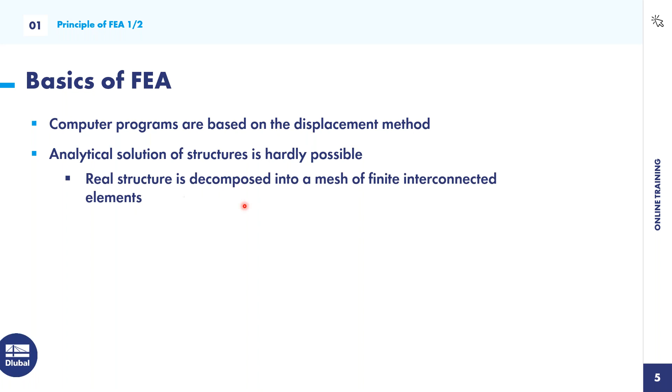So what you can do is decompose the real structure into a mesh of finite interconnected elements. At every element, or every element continuum, there are properties which will be described at the nodes, and then the mechanical behavior is described by approximation sets. Be sure that the finite element analysis is just an approximation of solutions or results.

And the most important point is the discretization. So what is discretization? It's a decomposition of the structure into finite elements. This is one of the most important steps in doing a finite element analysis.

So how does a procedure of a FEA calculation look? First of all, you determine the stiffness relations at local elements. You do a mesh of the whole structure, and then you transform the local stiffness relations to the global coordinate system.

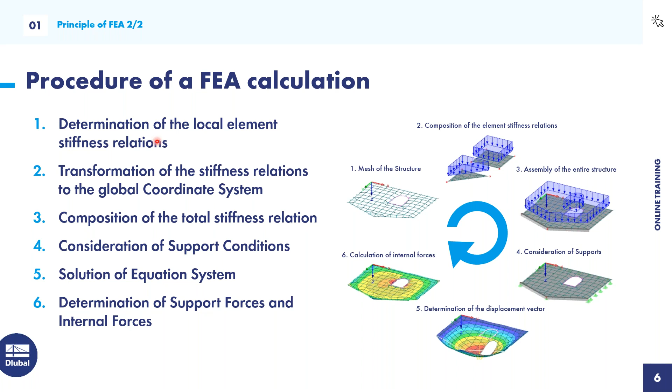Then you assemble or compose the total stiffness relations for the entire structure. You also have to consider some boundary conditions, like supports or hinges. Then the program calculates the displacement vectors, and after that you can calculate the internal forces and support reactions. So much for the procedure of FE calculation.

Now, this will be our first example, the continuous plate. But before we do this as an example, I prepared some questions for you. First, I jump to RFEM, the program, and I want to know if you work with two monitors, two screens, because if yes, I will adapt my pace and this would be more helpful for you.

Sometimes maybe we should mention that it doesn't work in full screen. So if not, just exit the full screen and you should be good to go. Thank you for the hint, Praxitelis. That's sometimes a problem, but this is the solution.

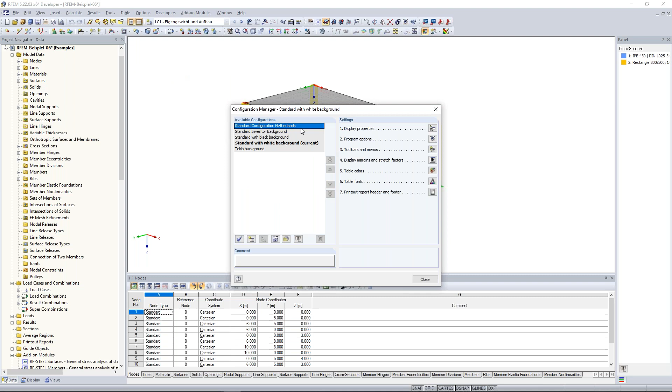So when someone is wondering why I have the white background and you are using the black background, here you can change it. Click here on options, configuration manager, and change the white background to the black background. Just double click on the black background. Now I have the black background, but I prefer the white background, so I click back to the white background.

Another interesting point, the program options, because we offer at Dlubal 10 different languages - English, Dutch, French, Italian, and other languages. So if you want to switch the language, just close the program and start it again, and then all program settings will be changed to the right language.

Under the menu bar, you will find the symbol bar. With the help of the symbol bar, you have faster and quicker access to the most important functions of RFEM. So if I want to create a new single member, just click here to new single member, choose this profile, and draw some members here. This is the fast access to the most important symbols.

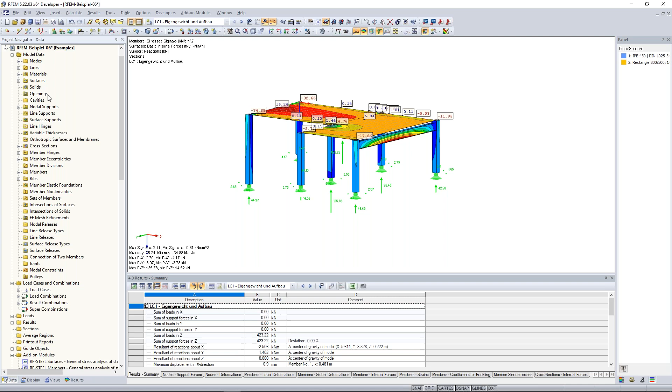Here on the left side, you see the data navigator, and with the help of it you have access and an overview of all existing model data. So here, for example, the materials you are using for this project. When I open this tree, I see materials - I see 2 different materials. First the concrete, and then the steel girder here on the right side.

The same with the surfaces - I have an overview of all existing surfaces, and the same also for nodes and so on.

When I click, for example, on one node, maybe here the 5th node, normally it will be selected here in the work plane, but you don't see the node so well because the nodes are very small. So just with a right click here and say find, and then a red arrow shows to the node.

And the same also for all other things like cross sections. If you click on one cross section, it will be selected.

At the bottom, you will find the add-on modules, with short information about RFEM and the add-on modules. With RFEM, you can calculate almost everything - RFEM provides deformations, internal forces, stresses, support forces, and soil contact stresses. So just these kind of results.

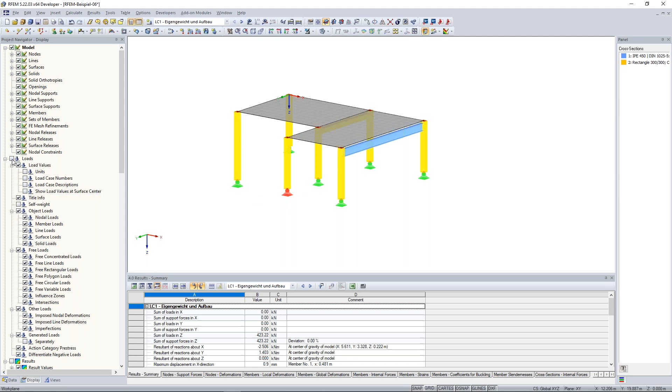For example, I don't want to see these supports here. I go here and deactivate the nodal supports, and I don't see the nodal supports anymore. The same with the loads - here I can activate them. I have also this kind of function here in the symbol bar, and the same with the results.

And also when I don't want to see the FE mesh, I can deselect that. Also the numbering, maybe that's interesting for someone.

One tip from my side: use colors and graphics according to the cross section. Especially for frame structures this is very helpful, because when you're using more than one profile, maybe 5 up to 10 different cross sections, you will see all cross sections in different colors, giving you a much better overview of your structure. Normally you have a standard, concrete has the color gray, and steel has a blue color, but if you have more different cross sections, this kind of information is very helpful.

The views navigator - if you want to have more different views, especially later for the printout report, or when you want to divide your structure into better parts for your calculation, the user-defined views will help you.

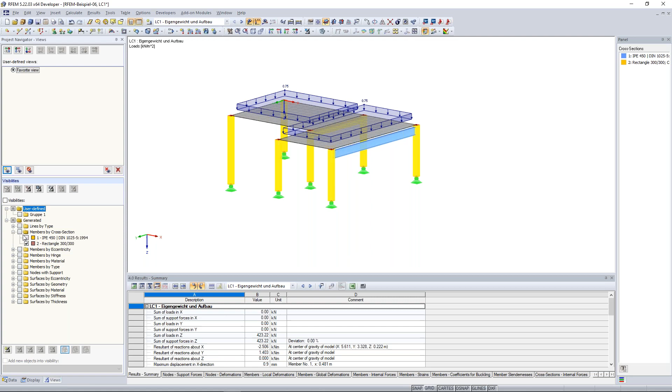The same also with visibilities. So when you want to filter some objects, some specific models, I would recommend using these visibilities. In this case, I want to show only my columns, so I go here, say members by cross section. I know the cross section of my column, so I open this tree, activate just the rectangle, and you will see just these members of that cross section. Very helpful to do that.

The same also with my steel girder here, steel beam. And now to the last tab - this is the result tab in the navigator. Here you have the possibility to show different results, so I cancel my visibility.

Now I want to show maybe the global deformation in UZ, the vertical deformation. I see here the steel beam, here the plate. Now I jump to the member - in this case the bending moment is interesting for me. So I see the bending moment of the steel beam, also this one here, and maybe also the normal forces. Interesting.

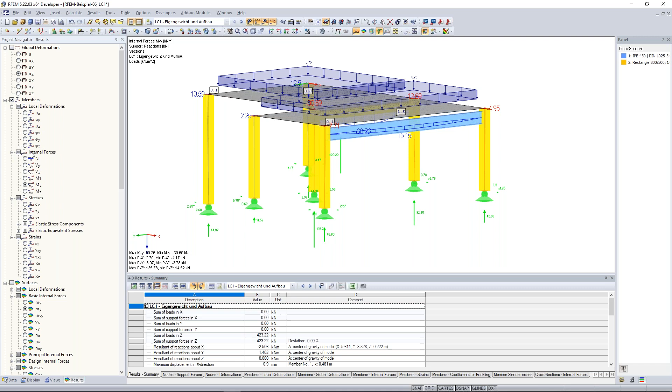Here's a short information about the tables. Here in the tables, you find all information of the models, loads, load cases, and so on, also the results. The one big advantage concerning this navigator on the left side is that you get more information, like here in the data navigator.

So when I jump to the materials here in the tables and to the materials here in the data navigator, you will see I have more information about the materials here compared to my data navigator. This is one big advantage, and it will interact with everything - when I create something in the tables, it automatically gets the same information here in the data navigator. So you will see in RFEM it's possible to create something in different ways.

Not only with the tables and not only with the data navigator, but also with the symbol bar and the menu bar and so on. It's up to you which way of inserting, which way of modeling something, is your favorite one.

Now some information, a short introduction to movement in RFEM. With the left mouse click, I can draw a selection window. It depends which side you begin from - when I go from the left to the right upper corner, to the right bottom corner, I select just the things that are really within this selection window.

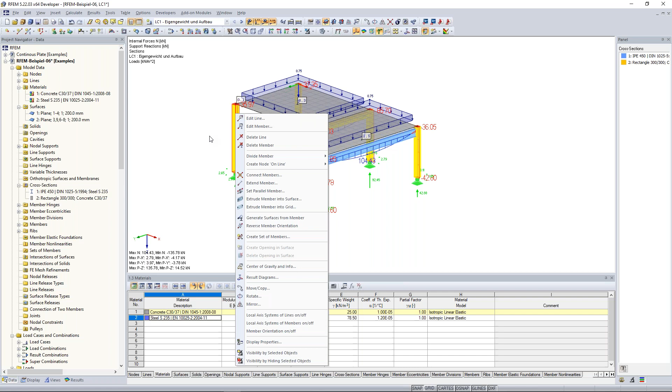Good, I think that was everything concerning this introduction. Praxitelis, some additional information maybe?

We've got one question, Daniel. Someone is asking how we can make this adjustment of the units permanent so it won't change if we close RFEM.

You can do it after, or every time. Just go to the options, and there you will find units and decimal places. There you can edit your favorite units and cross sections, and then you can save it also.

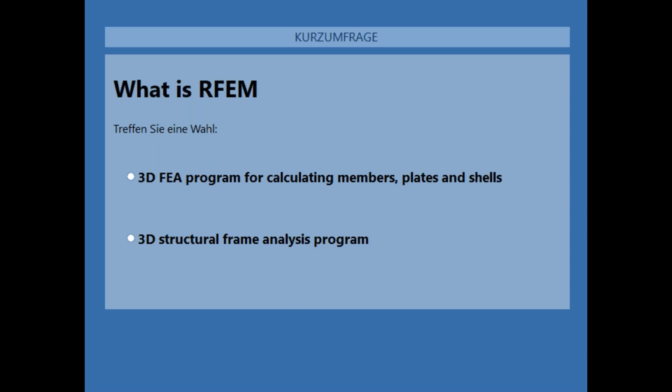Okay, I close this poll. And again, most of you were right. RFEM is a 3D FEA program for calculating members, plates, and shells, not only frame structures, but also members, plates, shells, folded plates, solids, contact elements, and so on.

So let's begin with our example. I jump back to our example, the continuous plate. The first step is modeling our continuous plate. First I want to show how it will look like. It will look like that, yeah?

We will model 3 different surfaces, and then we compare these results with our member, so with a continuous beam. And we will discretize it in different meshes, so we'll have different sizes of FE meshes, and it will be very interesting how the different results interact.

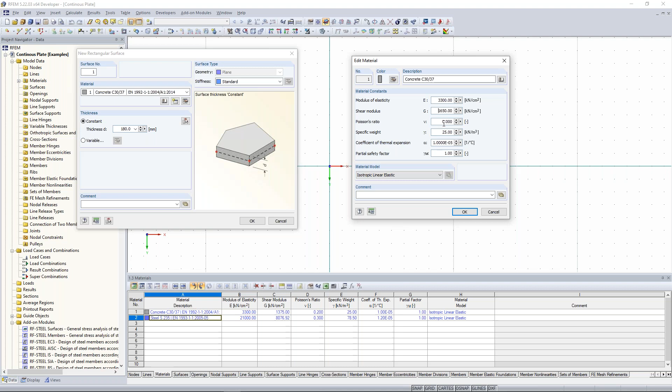Okay, I click on OK. One important point is that we set the Poisson's ratio to 0, in order to have no impact from shear deformation or additional shear deformation. Click here on OK.

And then we set our thickness of our plate to 300 millimeters. Click on OK. And then we draw our surface 10 meters long and then 5 meters into the opposite global Y direction.

And for the training, we do the same again, exactly the same again. So again, click here on new rectangular surface. Click just on OK because all information is right. And draw this rectangular surface again, 10 meters long and 5 meters high or wide.

And then I want to show you one big advantage: now we want to copy it. So select everything, draw a selection window over the whole surface. Now click, right click on the surface, and say move copy.

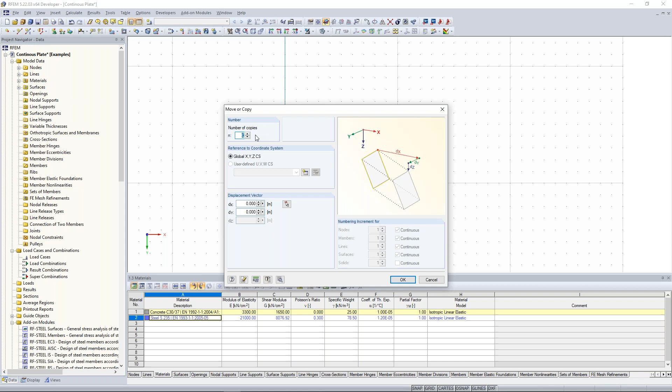And here we say, okay, number of copies should be 1 because we want to copy it. And the displacement vector should be from there to there. So now we have two possibilities: to enter a value of -10, or to pick the displacement vector.

I want to show you this option: select 2 points and return displacement vector. I click on that, say from there to there, and the displacement vector was created automatically. Click on OK, and voila, you will see this was copied here, exactly 10 meters higher.

Good. Now I want to have the additional continuous beam, or a beam. So I want to move these 3 surfaces a little bit. Draw a selection window over the whole 3 surfaces, and grab the middle surface at the left bottom corner, and grab it from there to there.

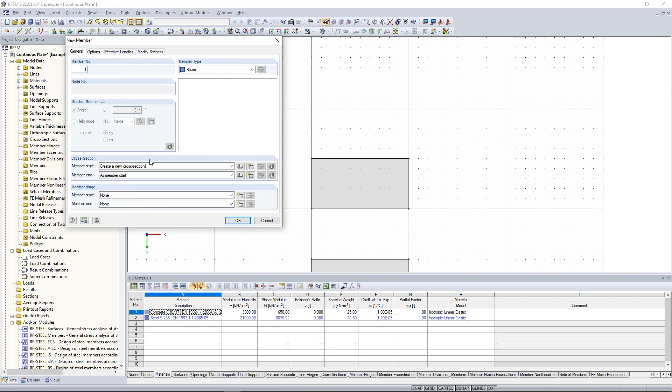I click on that, and because we haven't created a new cross-section yet, we have to create a new one. Go here, create new cross-section for member start, and then you have the possibility to set your cross-section properties manually, but of course you can choose one of the already provided cross-sections. Here I decide to take this rectangle cross-section.

So I enter the value of the width, 1000 millimeters, because I want to relate also to our concrete surfaces here, so concrete plates, and the height is 300 millimeters. The material is the same. I click here on OK. And again, I click here on OK.

And I draw my member from there to there, also 10 meters long. Now I pressed the Control key on my keyboard and also the mouse wheel, and I rotated my view of RFEM. Now I can see also a little bit 3D.

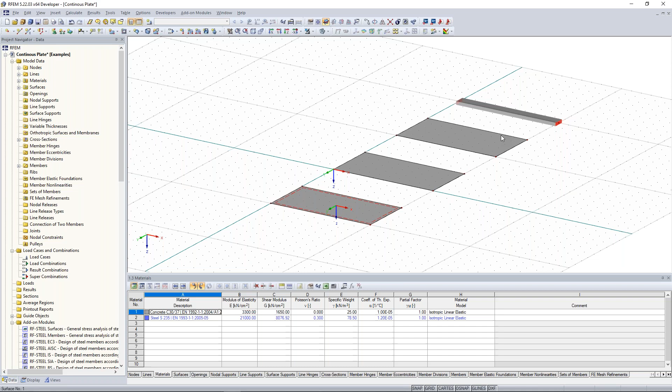Okay, good. So in order to provide or calculate it like a continuous plate or continuous beam, we have to divide it because we need an additional line there in order to provide the line support, and also here an additional node in order to provide an additional node for the support, nodal support. So how we can do that?

Here we have the possibility to divide this line. Click on one line with the right click. It will open this context menu, and here on divide line we have three possibilities: graphically, by intermediate nodes, or by distance. I decide graphically, and here I have the possibility to set the steps. In this case 0.5 meters are enough.

And then when I go over one of this line, I try to divide it at the length of 5 meters. You will see when I go through this line, it will change also. It will appear the right value also in the left window box. In this case, I have now 2 meters, and here, for example, 8 meters, but we need 5 meters. And this is one big advantage, you can do this at every line. But in this case, it's okay when we do it only for this bottom line here. And you will see, okay, now we have two lines and an additional node.

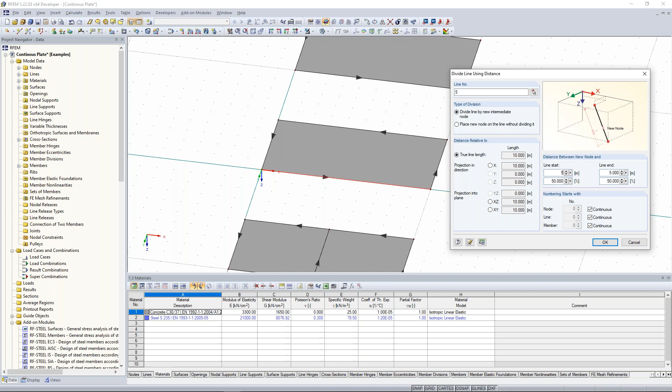Because here I can set, okay, from which length or from which distance should RFEM go to divide this. So when I set here 6 meters from the line start, the new node will be created at the length of 6 meters from the line start, or from the line end 4 meters. It's very important to know that we have here in RFEM this line orientation and also this member orientation, and depending on the orientation of these arrows, you will see where is the beginning and where is the ending of this line. So in this case, I want to divide it also exactly in the middle, 5 meters, and you will see it here. Okay.

Now, one cool point is that we can copy one object or several objects, also a lot of other objects with the help of a really nice function. And this is via drag and drop.

So I click on one line, then press the Control key on your keyboard, and then the left mouse click, and drag and drop it from there to there. The same thing we will do for this other thing.

Really nice thing. So again, press the Control key, click on the object you want to copy, and draw it or drag it from the favorite place you want to have it, and then left the mouse click, and then you copied this thing here.

Good. Now, last thing is that we want to have here also an additional node. Here in this case, I want to divide it in another way. And the first difference is that we don't have here a line.

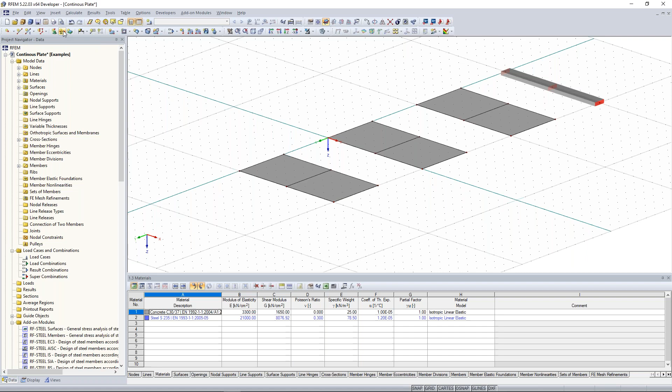Good, now we have to set our supports. For that, you can create here in the symbol bar new line supports. I click on that, and we leave this option as hinged. So please choose the hinged option. When we go to create a new type of line support, we see these support conditions are set so that we are only transferring vertical forces, use that. Click OK and choose the lines here.

You can also draw a selection window, but consider that you do it from the lower part to the upper part, also from the right to the upper corner here, like that. This is possible. Good, now the same thing for the beam.

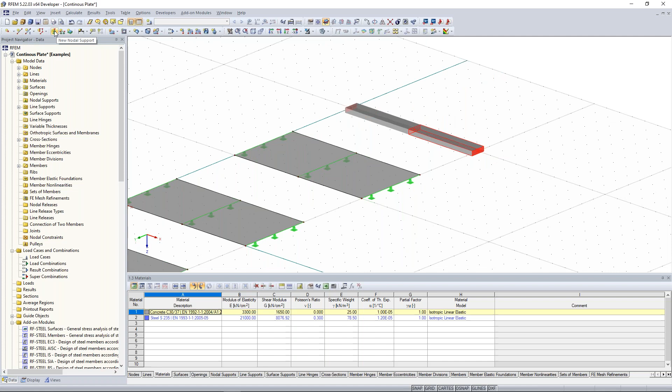First of all, I choose or select these nodes here. It doesn't matter if I also have this member chosen. I go here again to the new nodal support. And here I go again to the new nodal support. Now I want to tell you something about the support conditions.

When I activate one of these displacements or restraints, this means that the displacements in this direction are blocked. So in this case, UZ is blocked. This will provide us a support reaction, support forces - in this case, vertical support forces, because we are blocking the displacement in the Z direction. You will see it here also in this bitmap. Keep in mind that when you want the support node to carry these vertical or horizontal forces, you have to activate this one. Good, I click on OK.

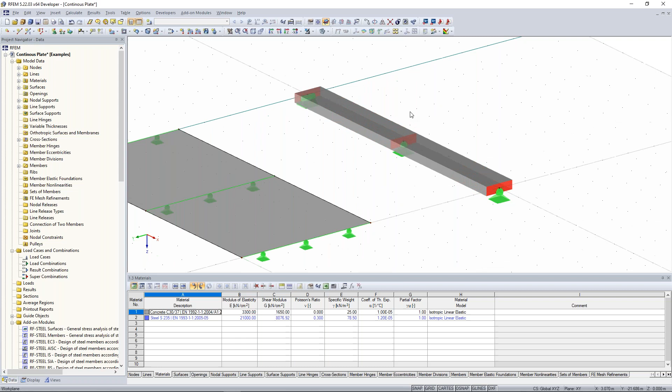Okay, good. So next thing is adding loads. Before we add some loads in RFEM, we have to first define some load cases. What are load cases? Load cases can be self-weight, imposed loads, wind, snow loads, and so on.

In order to do that, we click here on new load case. Here we see different action categories, also the load description. In this case, it's okay when we just write test load or something like that, it doesn't matter. In order to compare the results better, I deactivate the self-weight, and click OK.

Good, now I put some loads there. In this case, the new surface load, because we have 3 different surfaces here. I click on new surface load. I refer it to the global, related to true area. My magnitude is 10 kilonewton per square meter. I click OK and choose my surfaces here.

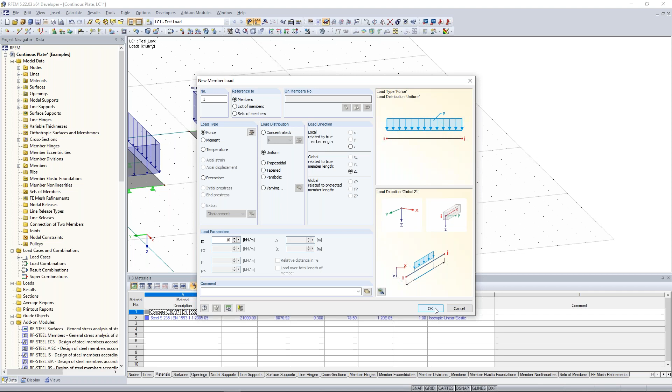Okay good, here in this case I use member loads. I click on that. My load parameter is 10 kilonewton per meter, and I draw here my selection window. Good, almost done.

Now I don't want to show the loads, so I click here on this eye icon with the loads, and deactivate the showing of the loads. Now I want to do a discretization, so I want to have different sizes of FE meshes - one bigger, one in the middle, one smaller. And here we leave it like that at the member.

So here in the data navigator, you will find the different FE mesh refinements. Click with the right click on one of the FE mesh refinements and select new FE mesh refinement.

Here you have the possibility to relate or apply to the surface. Enter the value of 1 meter, target FE length 1 meter, and choose the right surface. So I click here, choose this surface, click on OK, and then again OK.

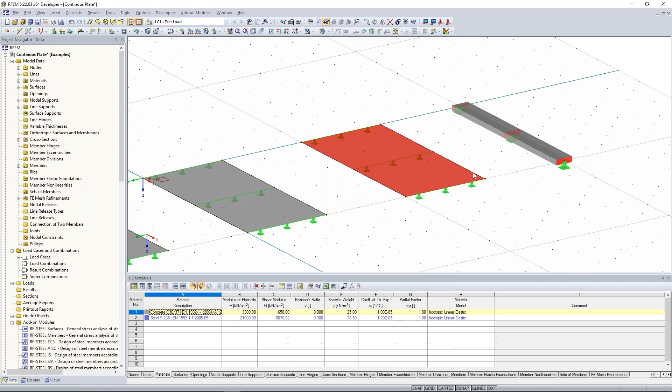And here the same thing, but we can do it also in a different way. Right click, FE mesh refinement, new, number is already right, click here, and put there a value of 0.1 meter. Okay, good.

Next thing are sections. In order to see the results in an integrated way, we need sections. For that, I create 3 different sections for the plates. So here, right click here in the data navigator, you find these sections.

With the right click, I want to create a new section, give it a name, in this case AA. The edge points of sections I will choose, so I refer from the one end to the other end. I refer just on that surface.

And the section on surface, or the projection direction, should be in the global Z direction. Good. I close this with OK. The section was created, and this kind of step I will do for the other surfaces too.

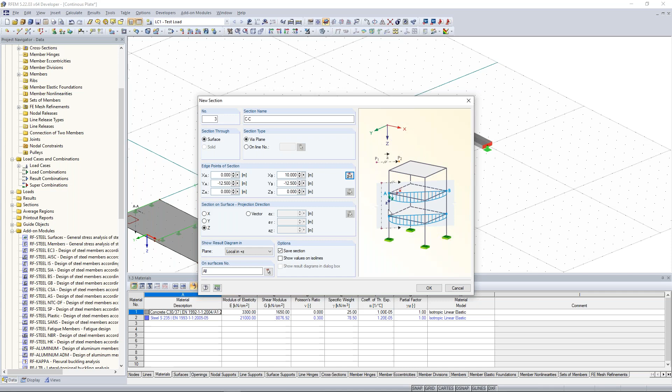Okay, good. Now we have everything, and we can calculate it. So for that, you can click here on calculate all, or here on show results. Same thing. When I click here on show results, this window will appear: results from load case 1 not found, start calculation, okay.

Okay, and first of all, what you see is always the deformation. First of all, check the deformation if it's okay. And yeah, the deformation looks okay. Here at the member, you will see also deformation when you want to have it a little bit in a better way.

So the way of showing that, go here to the display navigator, and click here also to deformation. Go to members and say okay, the cross section should be colored, and you will see now also the coloring of the deformation of the cross sections.

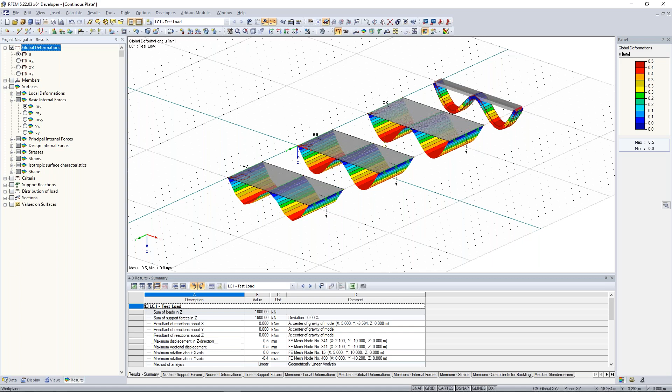Okay, good. Now, first of all, how we can prove our results. First of all, I want to activate the sections here, and I refer to these kind of basic internal forces, and I activate also this members here, bending moments.

Okay, what we can see now. So first of all, we see here the bending moment, first of all, of the member. I think that's pretty clear. We have here field moments, then we have here this negative moment, and here also the same thing.

And now, very important point, the different FE mesh sizes. Here we have this 1 meter discretization, here 0.5, and here 0.1. And you see, okay, the bigger the FE mesh size is, the results aren't so exact, like here at the very fine FE mesh sizes.

So here at every 0.1 meter, one result is provided. Here on every 0.5 meter, and here at every 1 meter. And please keep that in mind. It's up to you how you will do that.

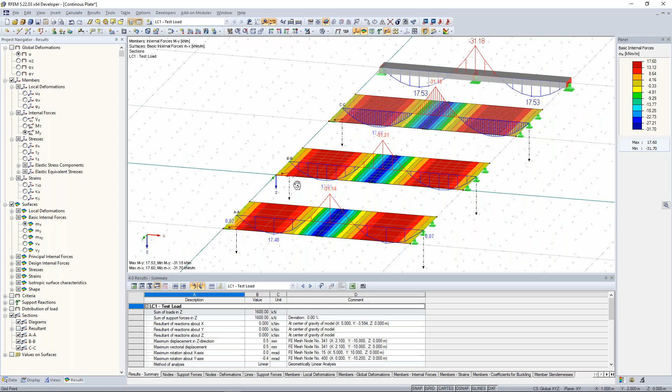The results at the specific points, like here at the middle, so here at the line supports, are very similar. But when you compare the results, maybe at 1 meter here, 1 meter away from that, you will get definitely different results. Good.

This is an interesting thing. And maybe someone of you is asking, okay, why are the internal forces, in this case the bending moments, a little bit different in comparison maybe to my hand calculation? Yeah, because in our study we use our hand calculation.

Maybe someone of you uses some formula in order to get that, and normally there should be maybe some nicer values, I would say. So not here this 31.18 kilonewton meters, but 38.25 kilonewton meters.

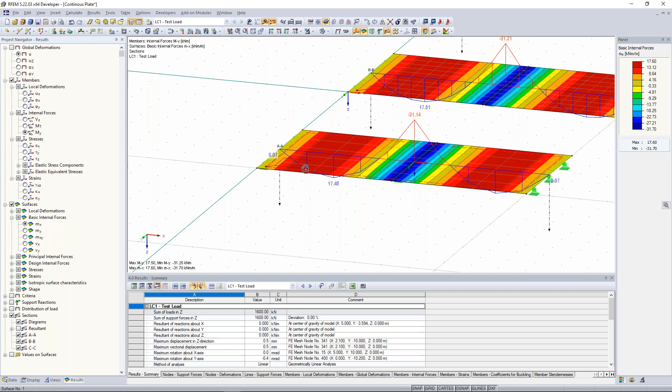And normally, in order to have good or normal results, there should be at least 4 FE elements within one surface, from one side to the other. Then you normally get results that are good enough. So when I deactivate that, let me just show you the FE mesh. You will see, okay, you have here 1, 2, 3, 4, 5 FE elements. This is okay, but it would be better if you had more than that.

Okay, next question maybe. We've got the question, what is the difference between line load and member load? So you have here a member, this continuous beam—this is a member. In order to add loads there you have to use member loads, because member loads refer really to members. But when you want to put loads on a surface, on the edge for example, this isn't a member, so you have to use a line load.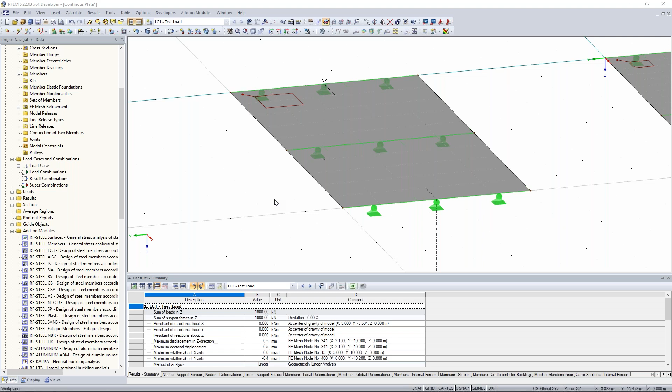Okay, another question? No, I think we've covered everything. Oh wait, I see one question, okay.

In my output the bending moment diagram is not visible—which option do I have to activate? I think you've forgotten to activate the sections here, to activate the sections and also here to show you the results. In the results navigator, just activate the sections and show result values, and also show the results generally. And here for the members, you have to activate the members and MY.

Okay, and the last question is: at the results, can I change only the orientation of shear forces without changing the orientation of bending moment? I understand—here you see the shear forces, and you want to change the direction. I don't know if that's possible, but you can change the orientation of the member, and then we will see how it will influence the shear forces. So select this one, say member orientation on, then you see the member orientation. Right click and say reverse member orientation, then you have to recalculate it.

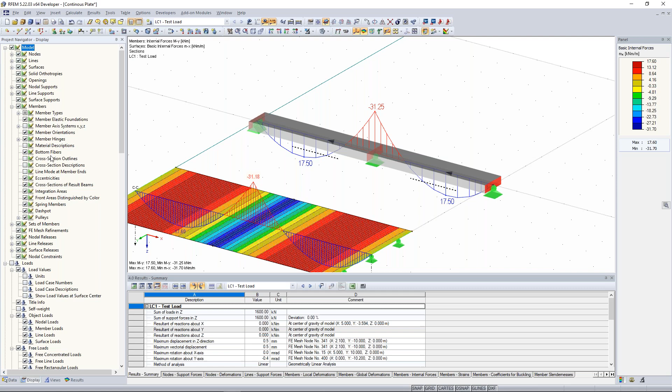Because when you want to see the tension fiber... Praxitelis, do you know the word for Zugfaser? Tension fiber, okay. I found it. So when someone is looking for the bottom tension fiber of a member, you can find it here in the display navigator. Go to the model and activate the bottom fiber, and here you will see this fiber, the tension fiber of the member. It will be helpful also for the study.

Good. Then I would say I have some questions for you. I have only one question for you. Better for you, please answer me that question.

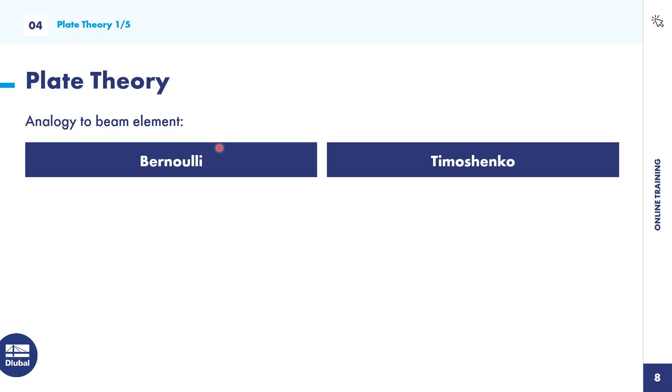So now I jump back to my PowerPoint presentation because I want to show you some theory about the plate theory. So in the study, you learn first of all the beam elements, the normal beam theory, the calculation beam theory. And normally you learn the normal Bernoulli beam theory. But there's also the opposite of that, the Timoshenko beam.

So what is the Bernoulli theory? First of all, there is the cross section. When I deform something, it remains in plane, and the cross section remains also perpendicular to the member axis. I have also prepared a picture later for that. One important point is that we don't consider any shear deformations because our shear stiffness is also rigid. This is one thing you study, you will calculate in the study. You will start with that because it's easier to consider, to calculate. And also a lot of the formulas you use are similar to that.

But there's also the Timoshenko beam. And the Timoshenko beam has the same things like the Bernoulli beam, so the cross section remains in plane and so on. But you consider shear deformation, and also the shear stiffness is limited, so it isn't rigid anymore. So we get an additional shear deformation, this WQ, and also more deformation. Here we see it remains in plane, perpendicular to the member axis. And here at the Timoshenko beam, we get an additional angle, in this case a gamma angle, so additional deformation.

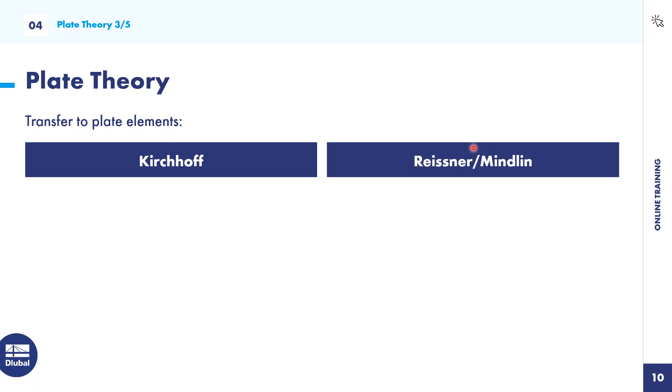So this beam theory we can also transfer to the plate elements. On the left side, similar to the Bernoulli beam, you have the Kirchhoff theory, and also the Reissner-Mindlin theory. For the Kirchhoff theory, here's some information about what we are referring to. We have geometrical linear, meaning we are looking just for small deformation and linear elastic material law, using Hooke's law, and the cross sections remain flat. So we have no warping, and also constant thickness, and also no consideration of shear deformations.

Reissner-Mindlin, the same four things are the same, but similar to Timoshenko, we consider shear deformation, and we also consider transverse and lateral strains. What are transverse and lateral strains? Imagine you have a beam, and you tie this beam with the help of some tension forces, and along its length, looking at the cross section, its width, as well as its height, gets thinner - this is the transversal lateral strain. With this mu factor, it will provide this lateral strain.

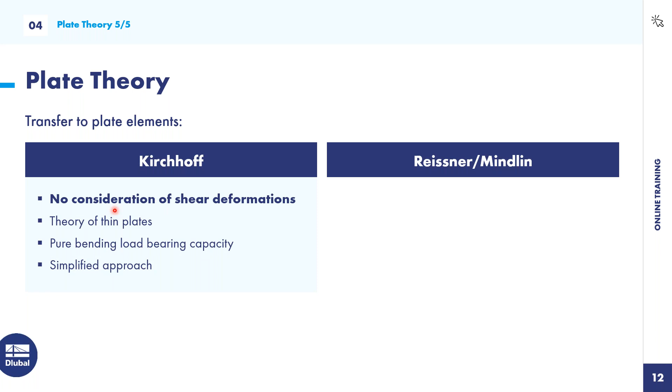Back to the plate theory, when we transfer it to the plate elements again: Kirchhoff, as a summary, has no consideration of shear deformations. So when I calculate with this Kirchhoff theory, these results are good enough for thin plates. Thin plates are normal concrete plates used in normal building structures and so on. You are considering just pure bending load bearing capacity, and this is also only a simplified approach. Otherwise, with Reissner-Mindlin, the results are good also for thin plates but also for thick plates. The component of the shear influence is relatively high, so you have to consider these kinds of shear deformations. And when we would neglect these shear forces, the errors and the bad results would be very high.

That's also the reason why we have a higher value approach, and we get more accurate shear forces. So as a summary, Kirchhoff you can use just for thin plates - normal concrete plates and so on. And Reissner-Mindlin you can use also for thin plates and for thick plates. My recommendation for you is please always use Reissner-Mindlin, because then you don't make any mistake.

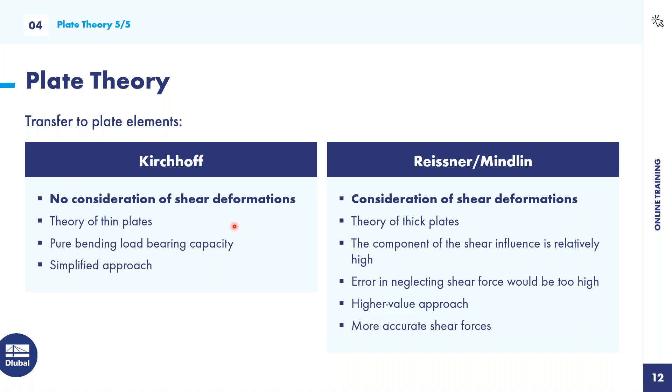Good, now let's jump to the next example. This is the Euler case 1 and the stability analysis of a frame. In the study you also learn about stability analysis a little bit, buckling cases and so on, and for sure also the Euler cases. We want to do the same here also with RFEM.

So what we do now is modeling this first column here with a clamped support, and the same also with this frame after that.

Good, let's go ahead and do that. Please create a new model. I create a new model by clicking here on new model, on this white sheet. I write Euler case 1, put it here to the examples, and now the important point is the type of model should be 3D, because we want to consider both directions concerning the buckling figures and pictures. So I activate this 3D type of model, and my z-axis is oriented downwards.

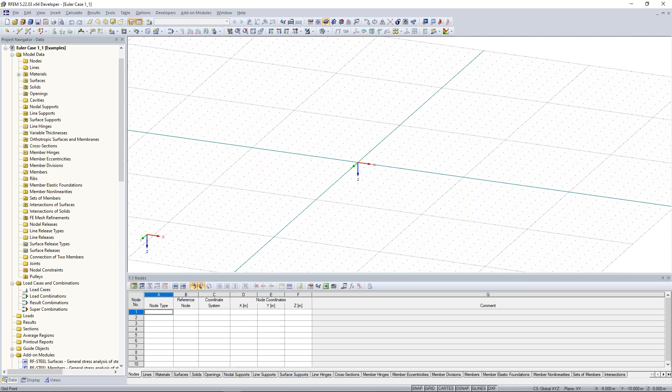As I said before, with RFEM you can calculate not only plates, surfaces and so on, but also frame structures. So we want to do that. In order to do that, go here, click on New Single Member.

And here I have the possibility to create a new cross-section. I do that. Because I am from Europe, or better, from Germany, it's very common that we use our HEB profiles. So I click on one of these HEB profiles. When you don't have it here, click on the material, on the cross-section library. It's the same.

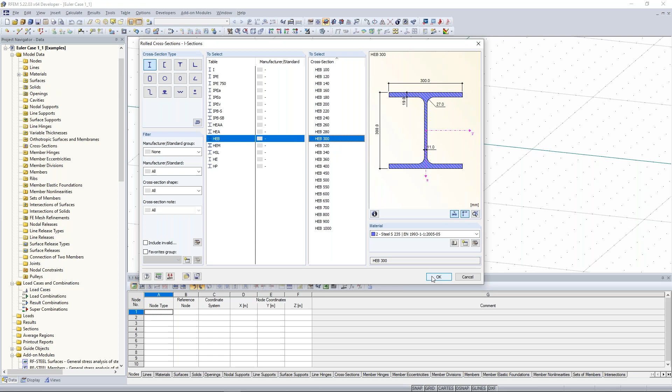Choose one of the rolled cross-sections, and choose here the HEB profile. It's a wide I-beam with parallel flanges - here we have our flanges. The web is especially used for transferring a lot of bending moments and also compression forces. We choose this HEB profile 300. Click on OK, and again I click on OK.

Now I want to make this column 10 meters high. You will see I have a little problem because I use the work plane in YX. Here I have the different work planes, but when I want to make it 10 meters high, it won't be possible because I also referred to this flat plane here. So one possibility is to change the work plane, like here. I can change the work plane and now I can draw my column 10 meters high.

This is possible, but there's also another smarter solution in my opinion: set the length and direction. So here I have this window, I set the length and direction perpendicular to my work plane, set the length to 10 meters high. You will see this member here, but not in the positive Z direction, but the opposite Z direction. I refer to my origin node here and click on OK. Now you see this member.

So now I want to add some supports here. I select the lower node, go to the symbol bar, click on New Nodal Support, and here I activate rigid, so all constraints and all displacements, all rotations are transferred to this support. You can see here these support conditions.

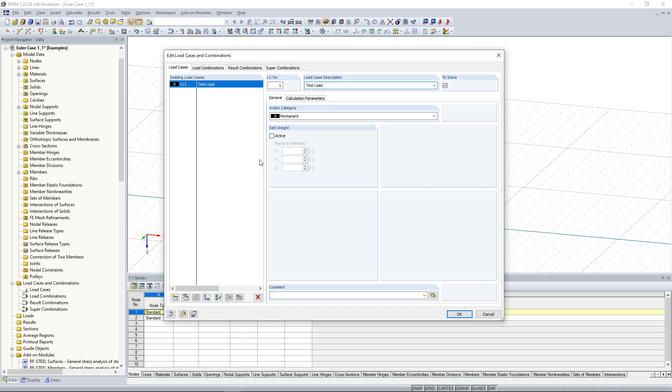Good. Now put there one new nodal load, so a single force. Enter here a value of 10 kilonewton. Click on OK.

And this was the wrong node. Please draw it from there to there. Okay, I made a mistake, unfortunately. I want to add this single force here to that node. Just click here, new node load, put there a value of 100 kilonewton and refer to this node here.

Good. Now, one important thing. Normally, the program calculates it by the theory of first order. So when I look to the results, I change a little bit my view in order to see this a little bit better. So here, go on view, reverse in Y direction, and I see it here. So the displacement, the deformation aren't interesting for me now.

For me, is interesting the bending moments. So I have no bending moments. I think that's pretty clear.

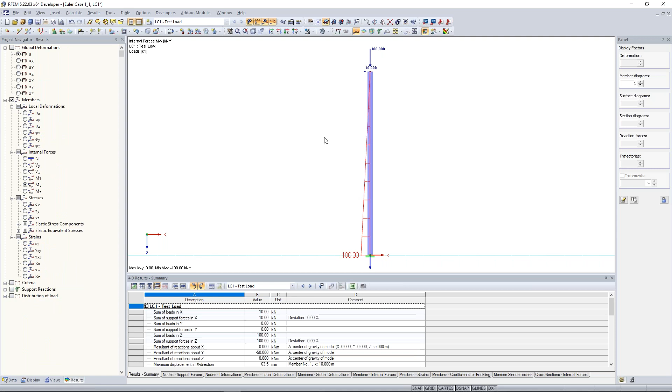And then you will see, okay, now I have a bending moment. I think that's pretty clear because I have a lever arm of 10 meters, a horizontal force of 10 kilonewton, 10 multiplied by 10 is 100, and a normal force of 100 kilonewton. In this case, compression force because it's negative, and so on. Good, I think that's pretty clear, yeah?

But in RFEM, we have the possibility to choose different calculation theories. So I go back, open the load cases and combinations. And when you go to calculation parameters, you will find the method of analysis. And normally the load cases are calculated by the geometrical linear analysis. But you have also the possibility to consider second order analysis.

Maybe someone knows this under the name P delta, yeah? And I want to show you the different results concerning that, because in Germany we have the second order analysis and also the geometrical linear analysis. And when you consider these two kinds of calculation theories, there are some differences, yeah? And I want just to show you the differences.

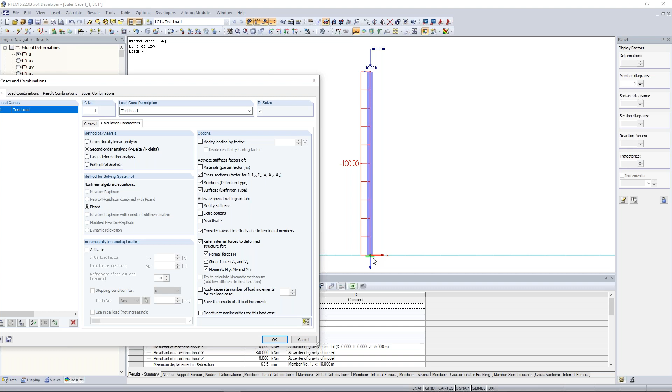When I activate this second order analysis, so first of all, we have compression force of 100 kilonewton and also bending moment of 100 kilonewton meter. Yeah, I think that was pretty clear.

Now, with the help of the second order, you make a calculation after, so you make the calculation, so you see the equal systems on a deformed structure. Yeah. So I calculate this again.

And first of all, I want to show you the horizontal displacement. In this case, UX. Remember this 68.7 millimeters. When you multiply this with 100, you will get an additional bending moment, yeah, of 6.87 kilonewton meters.

Now look to the bending moments. Here we have a total bending moment of 106.87 kilonewton meters, because with the help of the second order, because there we make the equality.

I have to look it up, this word. Okay, yeah, Google Translator is not so good. You build the equality, the equal system with the help in order to get your support, internal forces, and so on, the support reactions at the deformed system, and at the second order, yeah, or P delta.

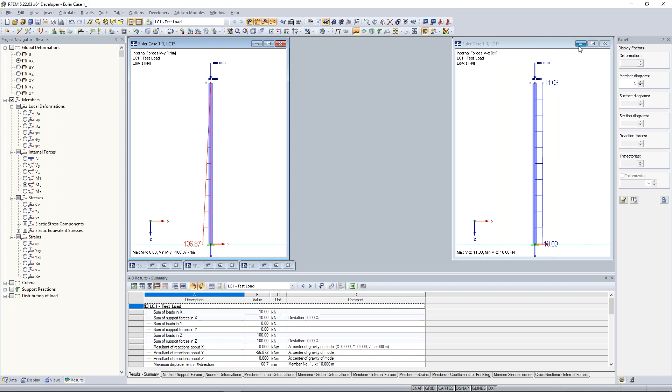Good. Now we want to make a stability analysis. I put this horizontal force away. So I write the 0. I just have this vertical force.

And now I want to make a stability analysis. What does it mean to make a stability analysis? I want to see different buckling cases and also to see the critical lengths.

So I have to start one of my add-on modules, in this case RF-STABILITY. When I open this, it will open this window here, and RF-STABILITY is make a stability analysis by the eigenvalue method. So it will provide critical lengths, also

critical values for this calculation of stability. So for that, I want to have this lowest eigenvalues. Number of eigenvalues should be 4, not more. I refer to this load case, test load, and I want just to consider this. I don't want to consider, and I don't have also to activate minimum initial prestress.

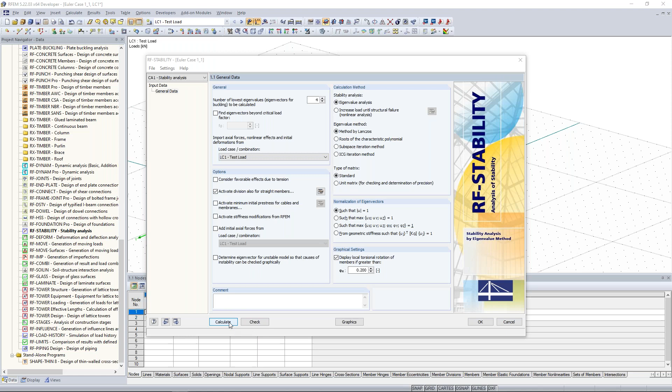Now I can calculate it. And the first things you can see is on the left side this critical load factor, and on the right side this magnification factor.

The most important thing is the critical load factor. What does it stand for? This critical load factor says to me that I have to multiply the whole loads of 100 kilonewton by this factor in order to get an instability of the whole structure. So when I get this instability, the whole structure wouldn't calculate and will collapse.

So when I have this 100 kilonewton and I multiply this 100 kilonewton with this factor of 4.4, so I get a vertical force of 440 kilonewton, and I calculate it with the help of the second order. I will get an instability of the whole structure, and my structure would collapse due to this critical load factor.

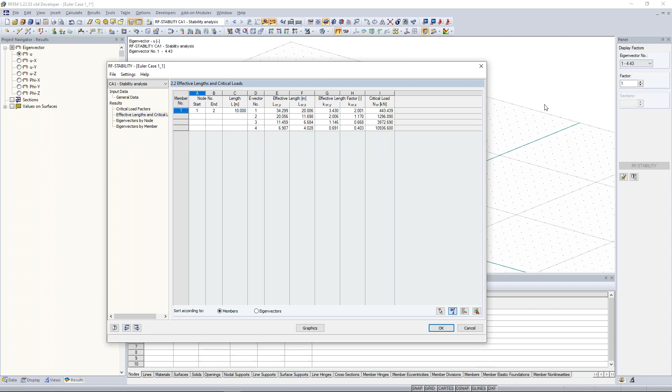But first of all, let's look to this effective lengths and to the buckling cases, to the different eigenvectors. So I click on graphic, and here I see the first eigenvector or eigenform.

And when I want to have this a little bit nicer, this view, I go here, go to the display navigator, and say, okay, here are the results. I want that the members have colored cross sections. And I think now you can imagine it a little bit better.

When I have here vertical forces, just a single force, what is the first eigenform of this cross section? I think that's pretty clear. The first eigenform is, or the first buckling is, that the profile is buckling around his own, around his weak axis. And this weak axis is around his z-axis. I activate it here.

I click on that column. I click here on local axis of members on, and here you see the local axis. So I have here the y-axis and the z-axis, and along his length I have this x-axis. And the first buckling case is that this column here buckles around his weak axis. And the weak axis in this case is the z-axis.

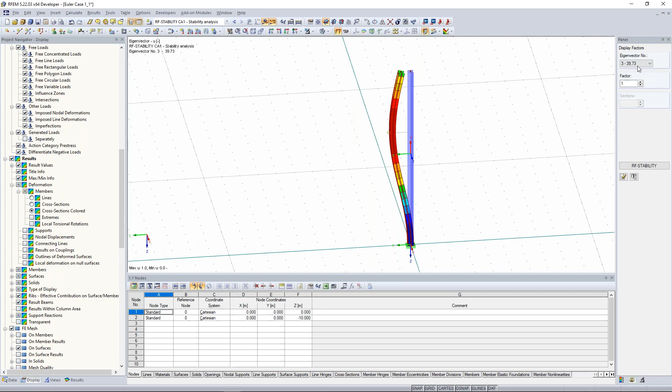Good. Now I want to show you what happens when we have more than these 443 kilonewton. So we have 100 kilonewton. We activate the calculation parameters calculated by the second order analysis, so the P delta. And now we put there more than 443.

In this case, 444 kilonewton, and we will get an error. And we calculate again. Yeah, and there is the error message. The stiffness matrix is singular. The model is unstable. Instability found in FE mesh node number, and so on.

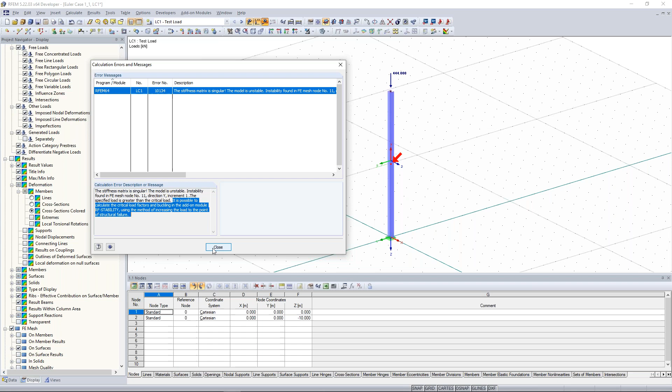Yeah, and there is a possibility how you can do that. So this means that we have too much load on our structure. Good. And now when I put there 443, it would calculate because this is under our critical load.

Now when I jump to the RF stability - sorry, I have to calculate everything first. I open RF stability and you see my critical load factor is now 1.001.

Now, some short information about this critical load factor. If this critical load factor is under 1, so 0.9 or 0.8, then you will get an error message when you calculate your structure by the second order.

And if you have here values of critical load factors between 1 and 10, you have to consider a calculation after the second order, and everything over 10 is okay - you don't have to consider any second order. It's when you calculate in the Eurocode 3. Eurocode 3, there you calculate steel structures, and there you have to consider that.

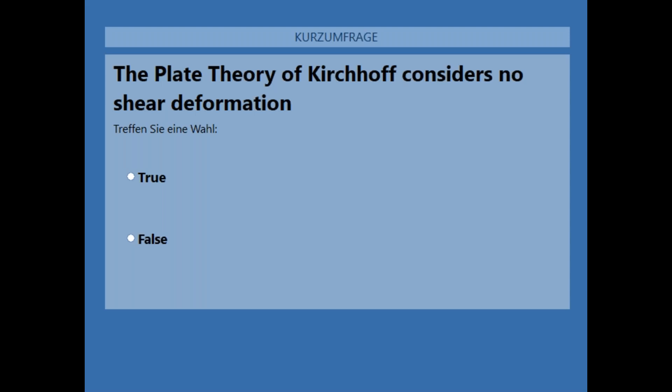Okay, good, let's see this result. So, of course, the plate theory of Kirchhoff does not consider shear deformation. The plate theory of Reissner and Mindlin does. And another question is that one.

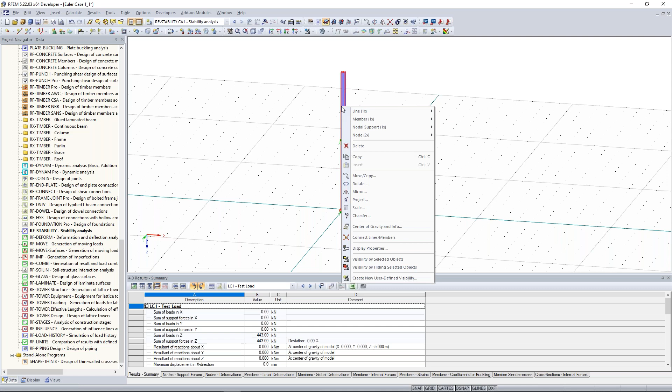For that, I copy just here this column. So I draw a selection window of that. Right click, say okay, move and copy. Number of copies, 1, and the displacement vector should be 10 meters to the X direction. Click on OK.

I deactivate the member axis now because I think that is clear now. And now I can change the height of this - I can change the height of these columns here. When you want to change something afterwards, that's every time possible. Like here, for example, I want to change the height of these columns.

I select the upper nodes here, click right click on one of this node, click one of these here nodes, say okay, edit node. And because the nodes have the same coordinates, the coordinate Z will appear, and here you can change it now. We change it here to -6 meters. I click on OK.

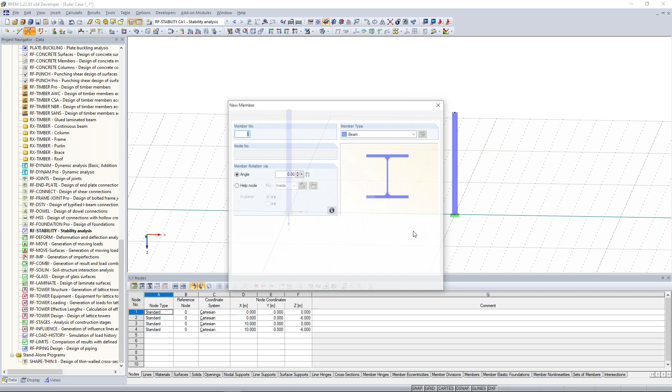And now I want to model a girder from there to there. For that, I decide to create a new cross-section. So I click here on New Single Member. I create here a new cross-section for the member start. And I take this IPE profile.

IPE profiles are very popular for using, especially as girders and beams when you get a lot of bending moments, because they are cheaper to produce than these bigger H profiles here.

Okay, I choose here this IPE 300 profile, click on OK, click again on OK, and draw this girder from there to there, so from the left side to the right side. With right click or escape, I close this window, and I have here now a frame.

Good, and I look back to my load case. So I jump there to the load case, and I copy now this single load from one corner to the other corner by drag and drop. So again, I click on that single force, press my control key on the keyboard, and copy it from the left side to the right side.

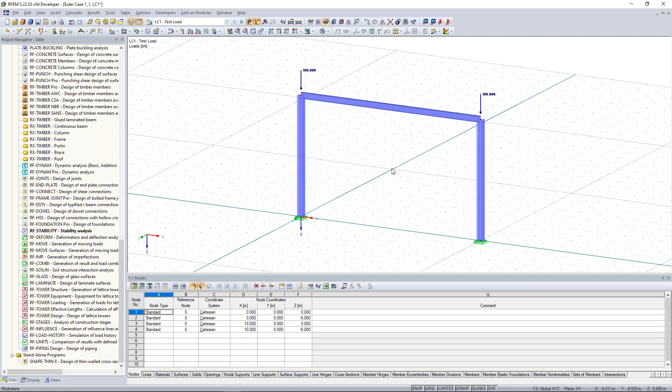Now I say again, okay, calculate all, please. And now we look to the different buckling cases.

Okay, now jump back to the RF stability. Here we see the first eigenvector, the second, third, and then the fourth. So what we can see now is the first one is out of the plane. We can make the factor a little bit bigger, the displacement, the display factor.

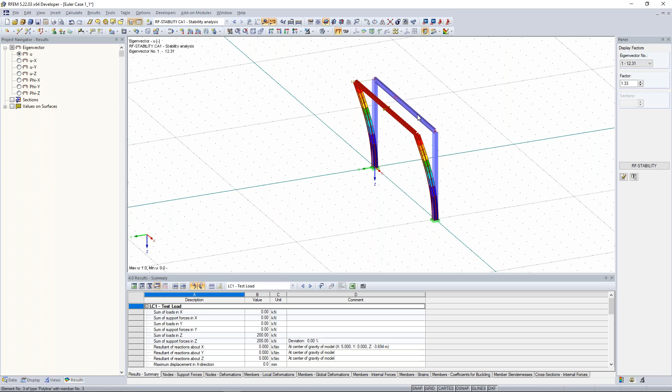So the first buckling is out of the plane, the second also. And when you compare it to real structures, this shouldn't be possible. This is one of the main things we as structural engineers don't want - that kind of frame should have this buckling case, because this is not very good. That's also the reason why we have continuous beams, and these continuous beams will hold this whole structure.

I can show you that also in a real hall, for example. I click here on the project manager. I have maybe there somewhere a nice example. Yeah, for example here. And in order not to have this kind of buckling case, we have here also these continuous beams, and they will hold this frame in one plane. But here in this case, we don't have this, and this is also the reason why this will fail first.

This third eigenvector is that buckling case, that eigenform that's very familiar, because this is maybe something we already seen in our studies or something like that. I think that is pretty clear. And in order to get this as the first buckling case or as first eigenvector, we have to consider the right boundary conditions.

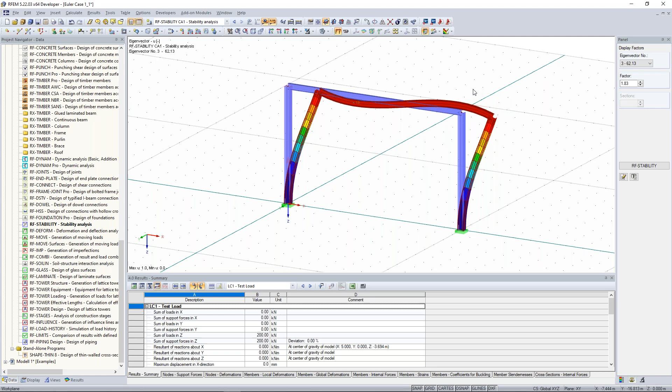So we can add some additional nodal supports, and then we don't have this kind of buckling form or eigenform. So let's do that. I take new nodal support, and what we have to do now is that we don't allow any deformation in the y direction. So I click on new nodal support, click here on new type of nodal support. I activate only the UY because I don't want to have any deformation in the y direction.

So I have to activate this UY. I click on OK, again on OK. I select this node here, I select this node here. And now watch out what we have now for eigenforms. I calculate everything. Yeah, and now my first eigenvector is this one I wanted to have.

So I think this is pretty clear now. But now you see, okay, I have again some buckling forms out of the plane along this column. So in order not to have this again, I can change the system from 3D to 2D. I'll show you the difference.

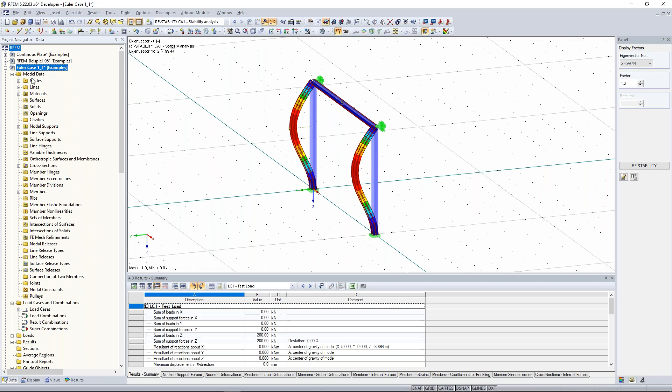So go to data, go here to the data navigator, to the right project, click with the right click on general data and change that type of model to 2D XZ. Then this window will appear and you say, do you really want to change the type of model? You say yes. And now you have just this one plane, and also these boundary conditions are a little bit different, because now it cannot be possible that this frame can deform out of this plane. So let's look at this RF stability again, to the results.

Yeah. Praxitelis. I think I am at the end of this online training. Do you want to add some information, or do you want to mention something? Yes, Daniel. Okay, as we've got no questions.

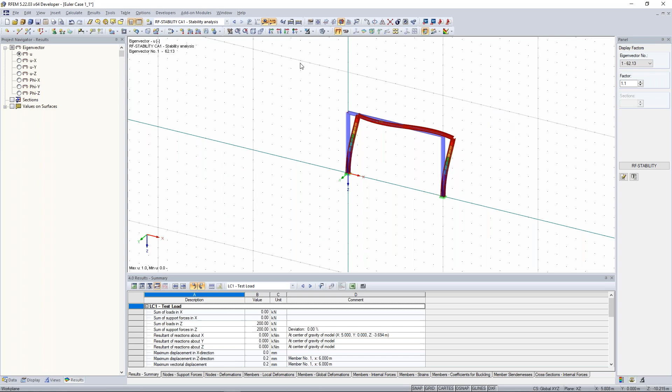I would like to show that context menu, maybe show them how it works when we draw a selection window over an element. Do you want to show that, or should I show? Oh, that? Yes, of course, I can do that. Yeah, sure. Okay.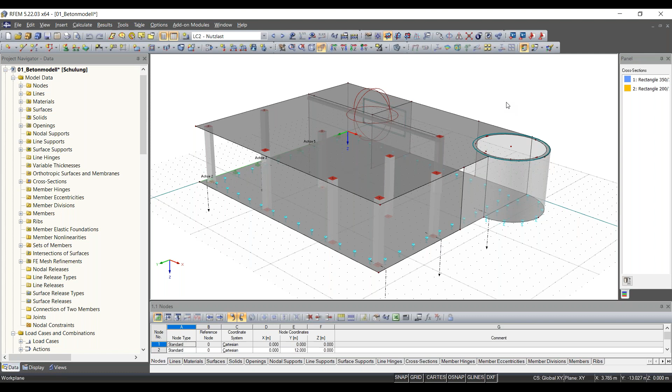I could show maybe Daniel the new flight mode as well. Yeah, of course, show that. Okay, so we've got a new super cool feature which is called flight mode. You can press on your keyboard Shift plus F, and now with your mouse you can rotate, and with the arrows you can fly through or walk through your model. I think Daniel, you can adjust the pace too. Of course, you can adjust the pace with the plus and minus keys. Exactly. Okay, so you can adjust your pace with plus, for example, make it faster, and fly or walk through your model if you want to see something.

Okay, and maybe the clipping tool as well. You can go here if you've got any results, for example. Let me show you this real quick.

My loads are in German, but that's another problem, I think.

Okay, so if you got your results here on your model, you can go under insert, on your clipping plane. Now you've cut through your model and you can see your results at that exact line, that exact cut. And of course you can adjust the offset or the step, make it bigger, for example. And the angle too.

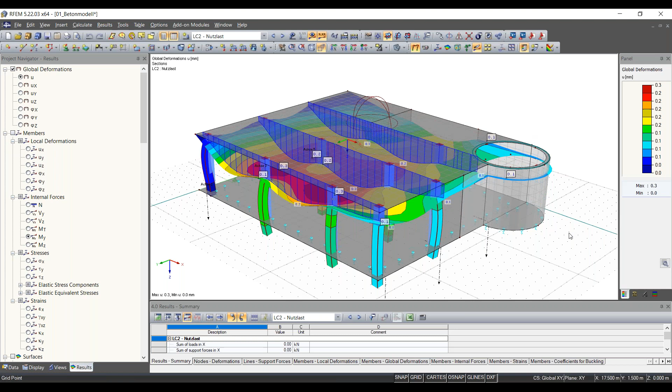By the way, this is the model which we will show in part 2. We will show you step by step how to model it and put loads on it. This will be a good guide, I think, to your first steps in RFEM.

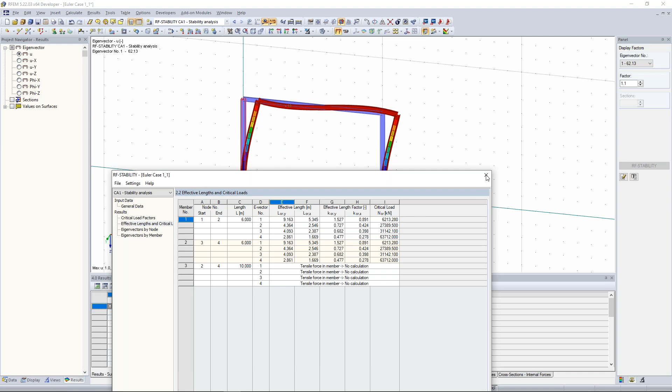And when I do it again with this Euler case 1, here we normally have a buckling length of, okay, this is now 6 meters multiplied by 2, so double. So we have a buckling length of 12 meters. I calculate it again. Sorry, I have, okay.

So when I jump to the RF stability and go to the effective lengths, you see here the effective length factor of 2. So 2, when I multiply 2 by 6, the length, I get this effective length of 12 meters. And when you ask yourself why isn't it exactly 2 - this is because of the shear stiffness. So I go back to calculation parameters. When I don't consider the shear stiffness, I deactivate that, calculate everything again, and then you will see the exact value.

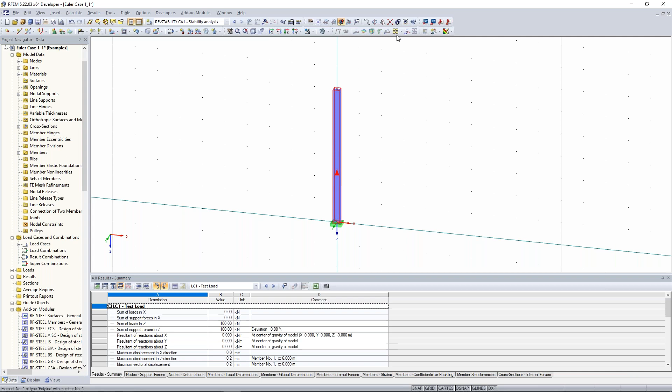Another question is, if we divide the element, will the buckling length be calculated also? Yeah, that's right, you will get the buckling length for each member number. So if you divide this length again, you will get it per member. You have to consider that there will be some different results. So when I divide the member exactly at the half and calculate again, you have to consider now different critical lengths, because here you have member 1 and member 2, and here the effective length is 4, but the overall effective length is 12. You have a different critical effective length factor - this is something you have to consider.

Good, next question. Whether we can export or import member locations to or from an Excel sheet.

Yeah, that's possible. Here in the tables you have the possibility to export or import a table. And when you want to import some of your members, you can do that here by members. The Excel sheet should have the same structure as here in RFEM, but that's possible. You can import and export the tables here. That's possible.

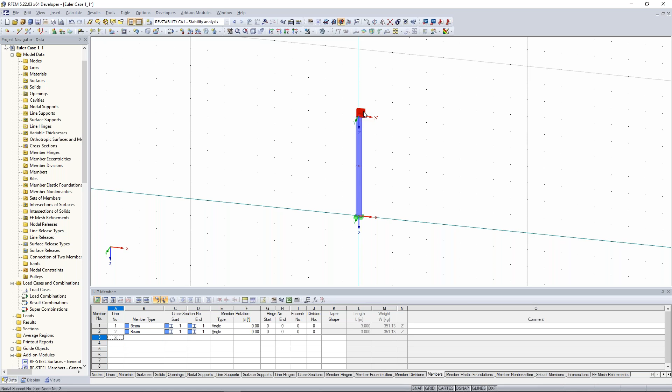Delete this node with the help of delete node, but merge the joint lines and members together, and make this 10 meters high. Okay.

Now my load is still there, so I calculate everything again. The reason why I want to have just 4 is that when you do a stability analysis, also referring to a design standard like Eurocode 3, only the first cases are important for your design, because when you have the RF stability, this would be the first fail if you would have too much nodal forces here. The second fail would follow, and other modes like 3 and 4 wouldn't appear because that's too unrealistic. So this is also the reason why a structural engineer looks only at the first 2 to 4 eigenvectors.

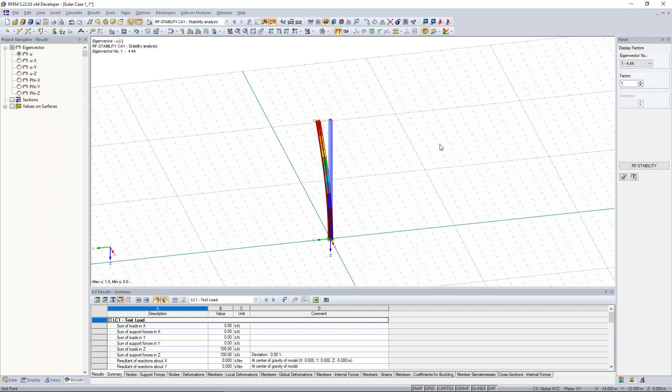I think at this simple structure it's very clear, but if you have a more complex structure, then you should look at more than 1 or 2 eigenvectors, because there can be some local problems or some global problems. Let me show it here.

No, this is wrong, this is a bad example. Maybe another example. Maybe this one would be interesting.

So, are there some loads? There are some loads. Okay, let's make a structural stability analysis on that case.

So I open RF Stability, I take the load case. I consider here 10. Okay, calculate it.

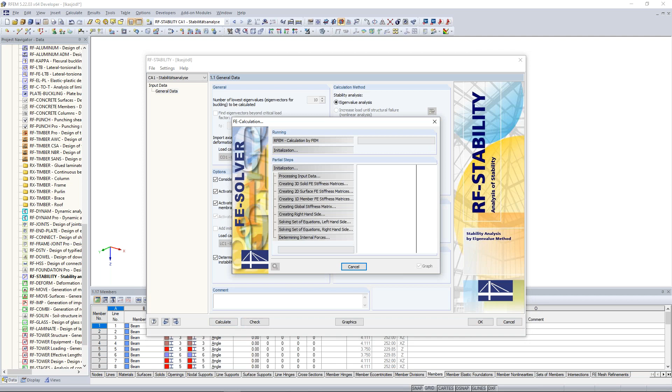Show me the graphics. And the reason is because I have here this one.

Now I'll calculate it again, sorry for that, because I have this option, determine eigenvector for unstable model. But I think this model isn't unstable. Show me the graphics. Okay, here we can see some interesting things.

So, here we can see this eigenvector, and here we can see the deformation in the y direction is a global problem, and there I think there's some joint problem, because it shouldn't be like that.

When we look at other eigenvectors, we see there's also deformation in the positive or negative y direction. We can look also at some local problems, but I think there are just some global problems. But it can be possible that one column is maybe too weak, and this would mean we have a local problem there.

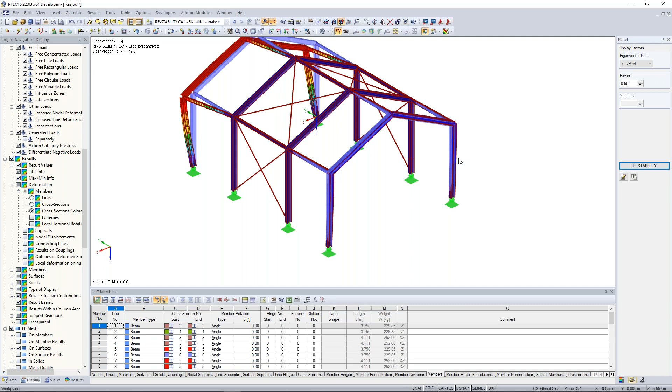Yes Daniel, we had a question recently: if we could show how to perform a load combination. I don't know if you want to show it now or perhaps in a next training. This will be part of the next training, but I can show you that very fast.

So very, very fast: I create here for that example a second load case. In this case, test load 2, but into another action category, in this case imposed. Click on OK. Now I put there an additional nodal force, in this case 200.

And then I create a new load combination. We do it now manually; in the next training, the second part, we do it automatically. So I jump here to the load combinations.

I create here a new load combination, give it the name 'design internal forces', and put both into that. The different partial factors are here. I click on OK. And when you look now at the load combination, you see here there's 300 and 135. And this is a load combination.

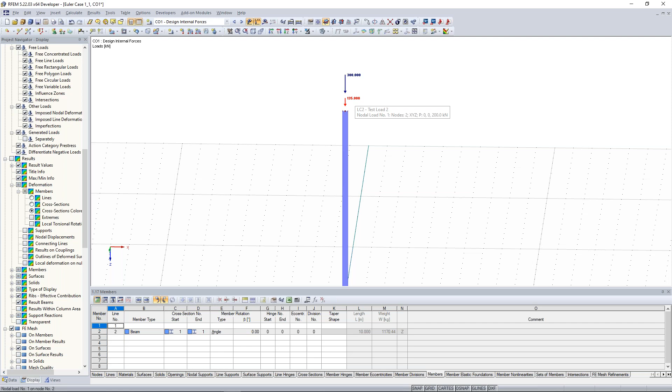Okay, next question maybe. How do we check... sorry, I'm not quite understanding the question. Okay, how do we check if the joint of a member is okay, and how are we designing it?

Okay, so first of all, the checking of nodes, if that's okay: you have here the possibility to make a plausibility check. This function allows you to check if the whole structure is modeled okay. Also, under the tools, you have the model check, and here you can see, for example, if you have identical nodes, so two nodes in exactly the same place, and also some other things like overlapping members, lines, and so on. This is one way, or sorry, two ways to check the nodes and also the system.

And for designing joints or connections, you have to use one of our add-on modules. In this case, when you consider steel structures, you have to use... where is it?

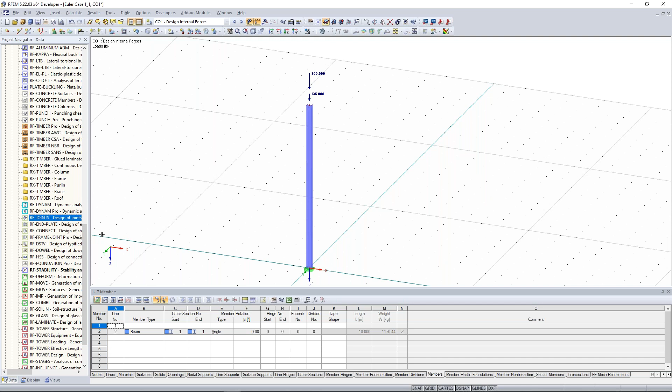RF joints, design of joints. This would be the add-on module for designing joints here.

Next question. Is RF stability a general add-on for concrete, steel, and timber structures? And if so, what does RF timber do?

Yeah, so RF stability is an add-on module. That's right. There are different design possibilities to make the stability analysis concerning concrete, steel, and timber structures. And maybe in the steel structures, there is one possibility to make a stability analysis with the help of the equivalent member method.

And to do that, you have to know the buckling lengths. And the buckling lengths you can calculate with the help of RF stability. And the same also with timber structures.

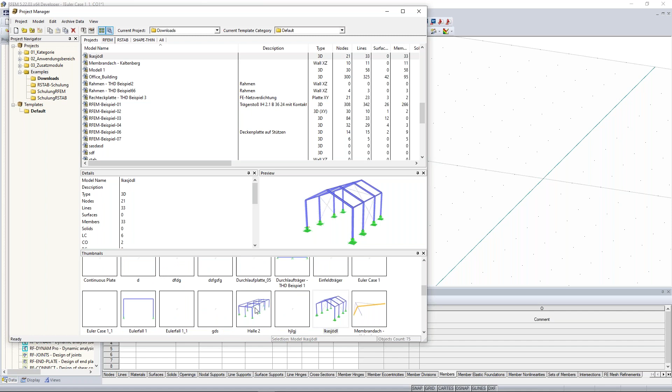Okay, so in this case, I create a new load case. This will be a wind load. And there are several ways to put in the load.

For example, when I have to consider suction or compression forces concerning the wind loads, I have to do it like that. First of all, new member load, because these are only members. I put the wind loads, so I refer to the local related to true member length.

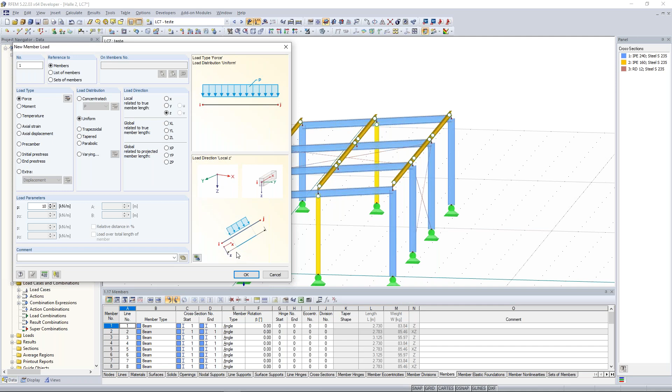And in this case, when I have to consider the suction or the wind pressure at their value, when I want to consider the compression wind, I have to add a positive value. And when I want to consider a suction of the wind forces, negative, because it relates to the locally orientated z-axis. Yeah, this would be the wind load.

And when I want to consider snow loads, for example, I have to use this kind of member load. This would be the global related to the projected member length. This would be the snow load.

And this is a little bit different to the self-weight. If you have some loads on the roof, this is a little bit different. Okay, good.